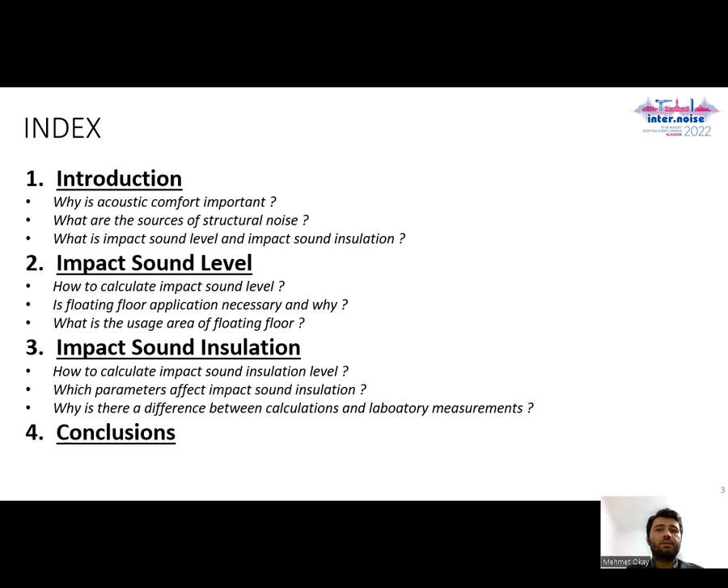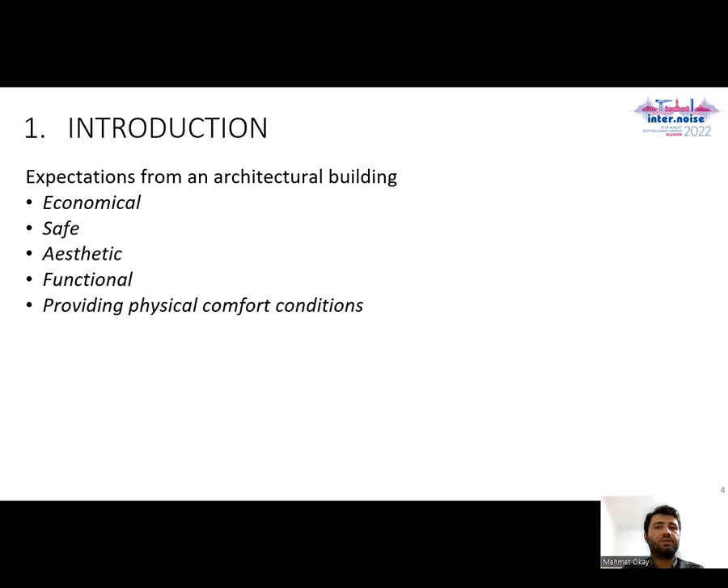As you know, we have expectations from today's architectural structures such as being economical, safe, aesthetic, functional, and providing physical comfort conditions. Physical comfort conditions can be explained as thermal comfort, visual comfort, and acoustic comfort. Noise control and volume acoustic studies are carried out as the subtitle of acoustic comfort.

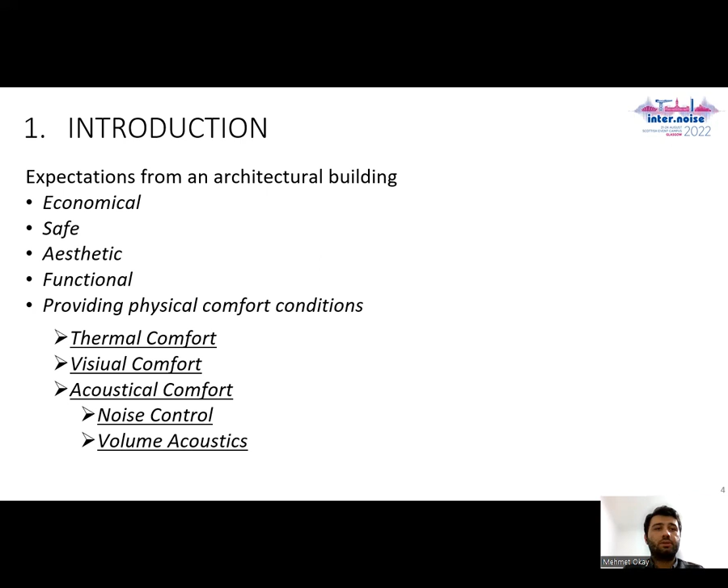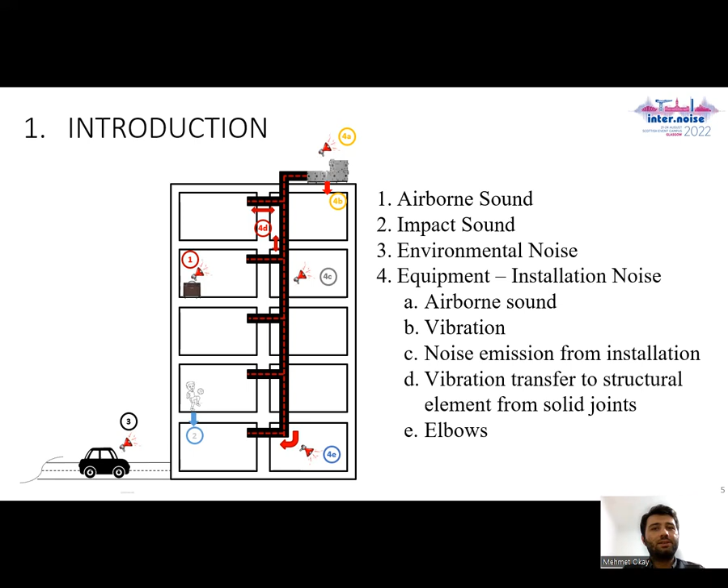Due to city life and living in high-rise buildings, we are exposed to many noise sources in our homes and workplaces. Each of these noise sources negatively affect our lives due to their psychological and physiological effects on people. However, due to the differentiation of the solution method, impact sound insulation is considered to be of particular importance.

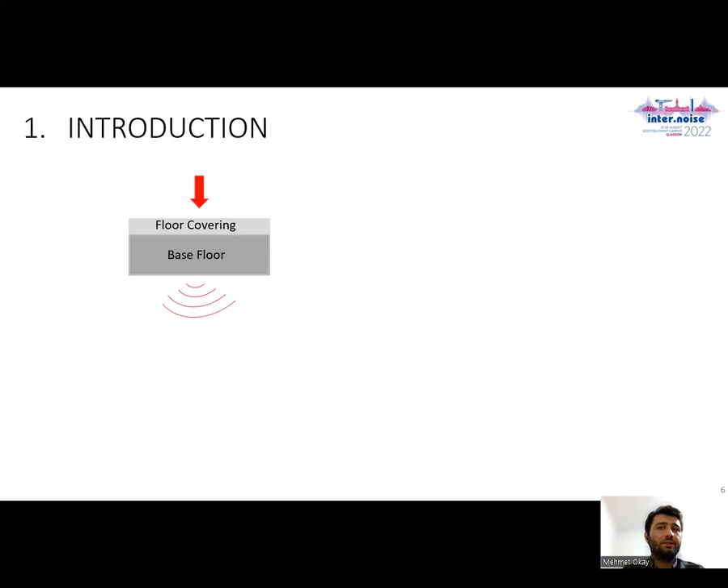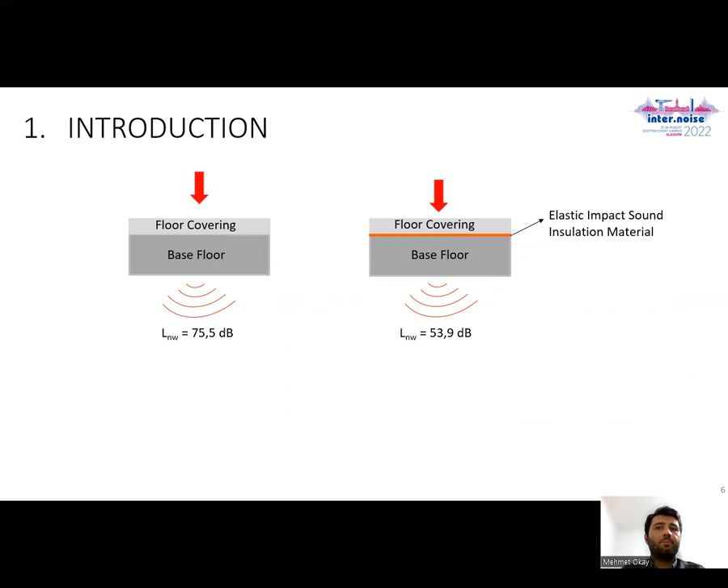The sound heard on a lower floor due to the impact on the floor is called impact sound. An elastic material should be used between floor covering and floor in order to reduce the impact sound on the lower floor by reducing the impact on the floor. Impact sound level difference between sections with and without elastic material is expressed as impact sound insulation.

Since these solutions should be applied in principle for impact sound insulation, eliminating the discomfort caused by incorrect application, wrong calculation, or wrong material selection causes very significant time and cost losses. For this reason, the right solution of impact sound insulation at the design stage is crucial.

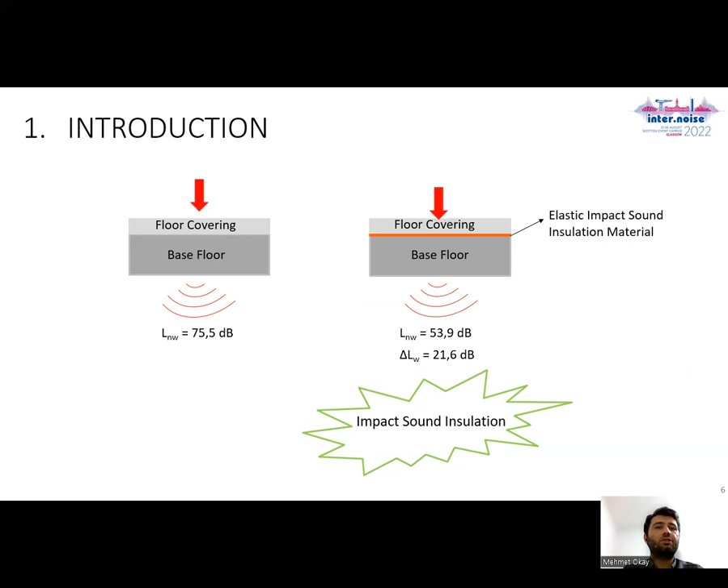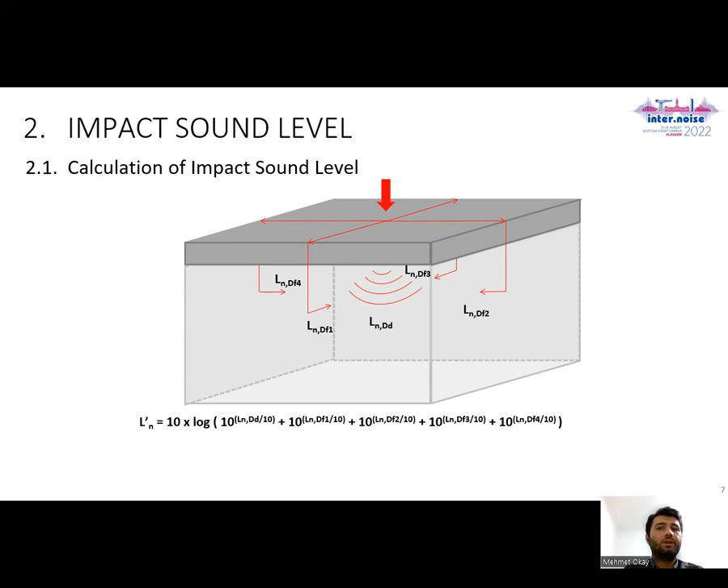Direct and indirect transmissions are summed on a logarithmic basis for the total impact sound level generated in the receiving room. After the volume effect is included in the calculation, it is weighted according to EN ISO 717 Part 2 standard and turned into a single number.

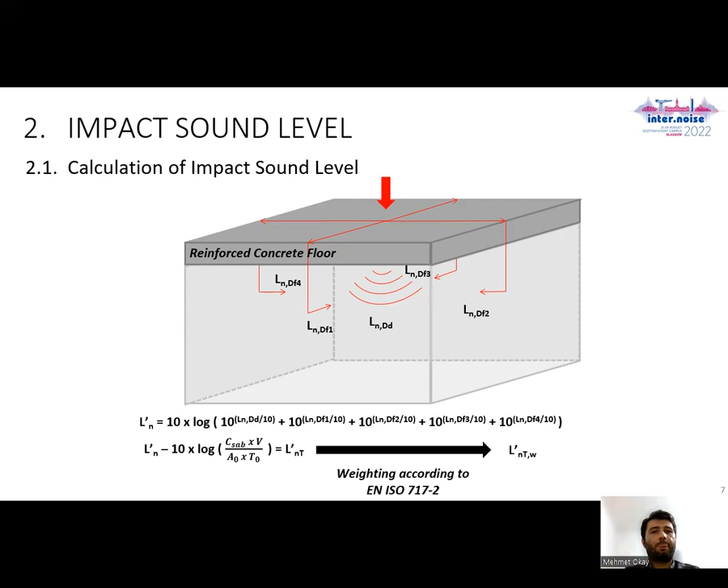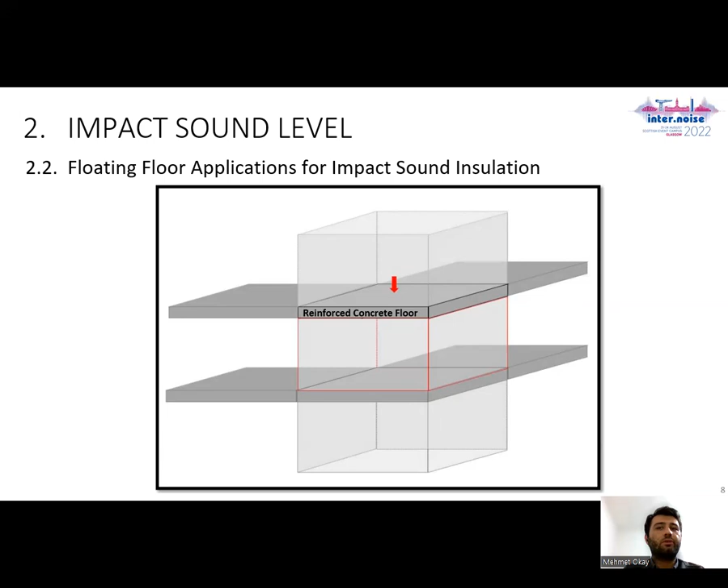In order to understand in which situations a floating floor is necessary, a theoretical model living space has been established, as seen in the figure, according to the most unfavorable combination and structural element situations. The theoretical model living space was chosen as a room located in the corner of a building and on the mezzanine. This is the plan view of the theoretical model living space.

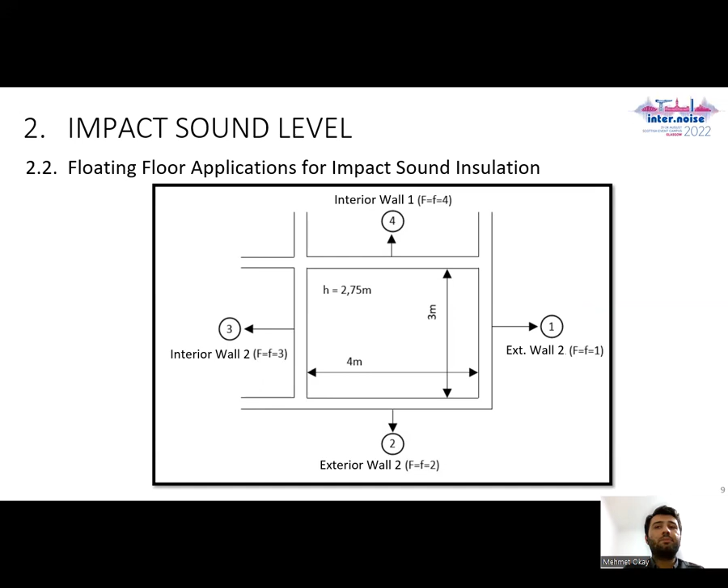In this theoretical model living space, only the floor thickness was changed between 15 and 40 centimeters, and impact sound level calculations were made by keeping all the variables constant. The calculation results and the highest allowable impact sound levels, according to Turkish standards, are compared on the chart.

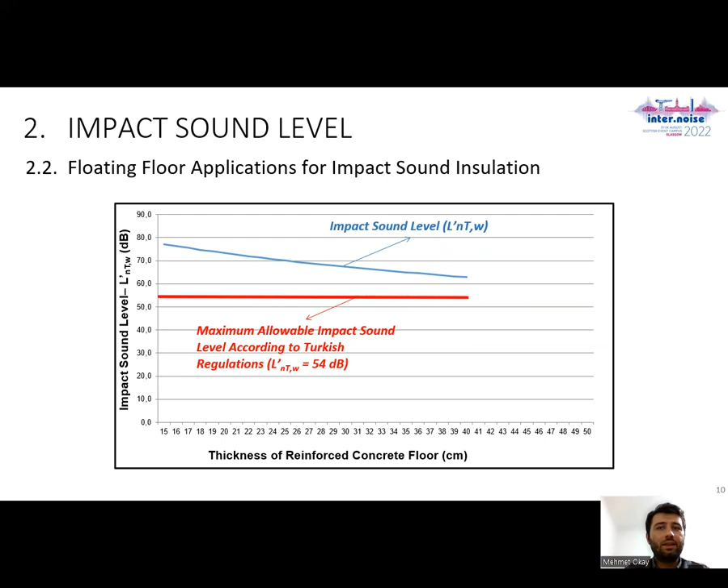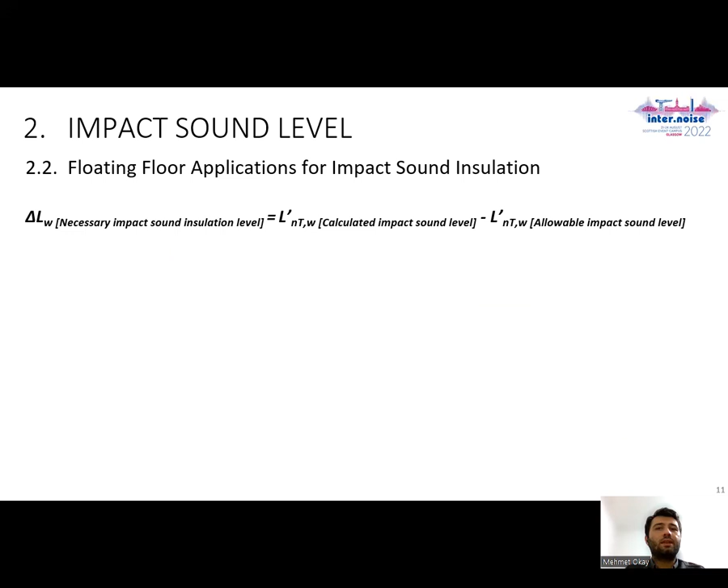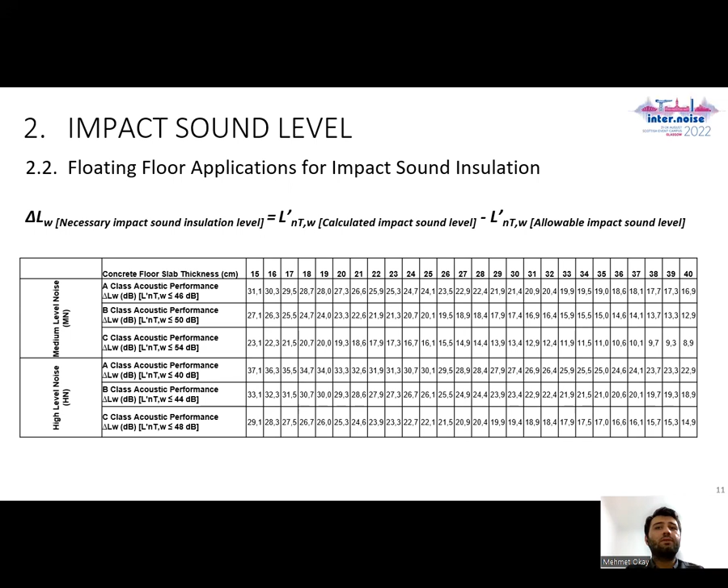According to the chart, impact sound insulation evaluation is required for all reinforced concrete floors with a thickness between 15 centimeters and 40 centimeters. The arithmetic difference between the two graphs reveals the impact sound reduction that the floor covering must provide. The table shows the impact sound reduction required to achieve acoustic comfort according to the noise level and the targeted acoustic performance classes.

According to this examination, it was seen that delta LW 19 decibel is the transition zone. In general, impact sound reduction of up to 19 decibel can be achieved by insulating the impact sound under the floor covering, while it has been observed that impact sound reduction from 19 decibels to 37 decibels can be achieved with the floating floor application. For this reason, the table has been arranged as it is in order to understand the necessity and usage area of floating floor.

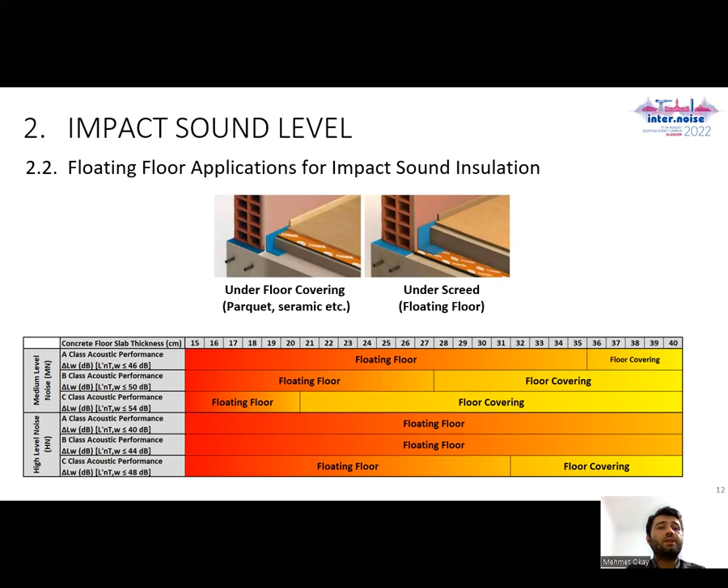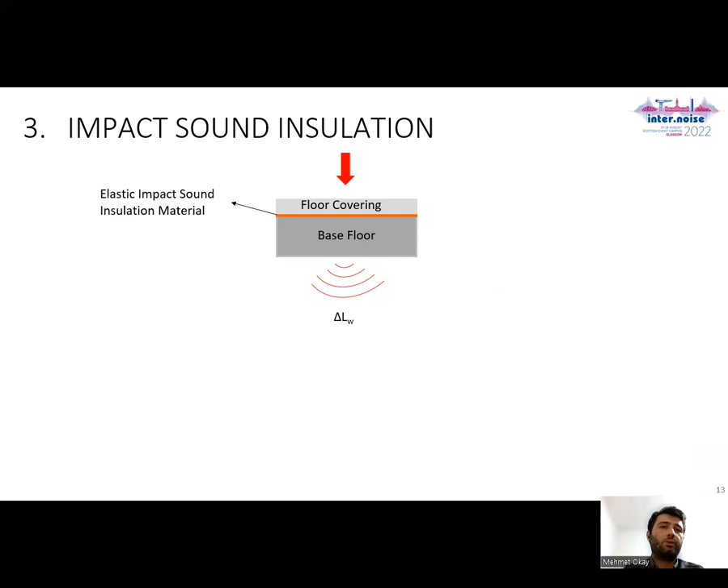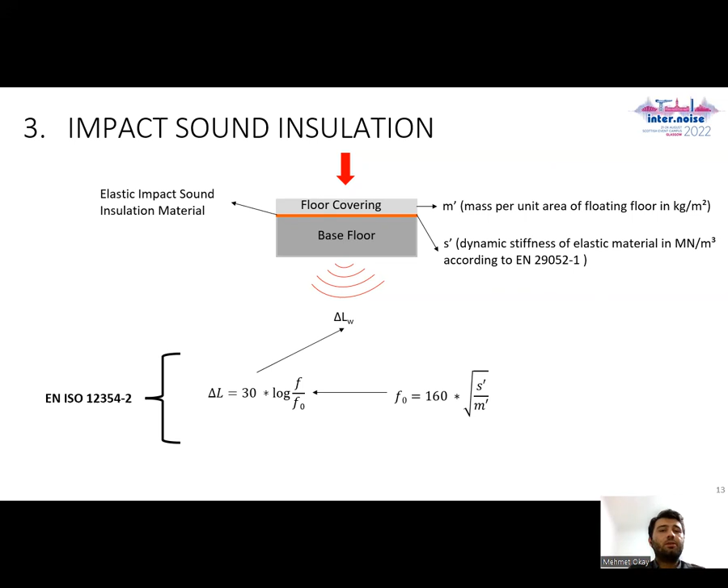As can be seen from the table, floating floor has a very wide usage area. Impact sound insulation calculations for floating floor are made according to the EN ISO 12354 Part 2 standard with shared equations. As can be seen from the equations, the impact sound insulation according to the calculation method depends on the mass per unit area of the floating floor and the dynamic stiffness of elastic material. However, studies show that there are differences between laboratory measurements and calculations. In this part of the study, the factors causing the difference were examined.

Firstly, dynamic stiffness. Dynamic stiffness is measured in the laboratory according to EN 29052 Part 1 using a steel plate measuring 20 centimeters times 20 centimeters and weighing 8 kilograms. Assuming that this measured dynamic stiffness is constant in all cases, impact sound insulation calculations are made. However, in the study, the results of which are shared in the table, dynamic stiffness values were obtained from laboratory measurements of impact sound insulation by reverse engineering with the relevant equations.

According to the table, two conclusions are drawn. One, measured dynamic stiffness and obtained dynamic stiffness are different. Second conclusion is dynamic stiffness varies depending on the mass per unit area of the floating floor.

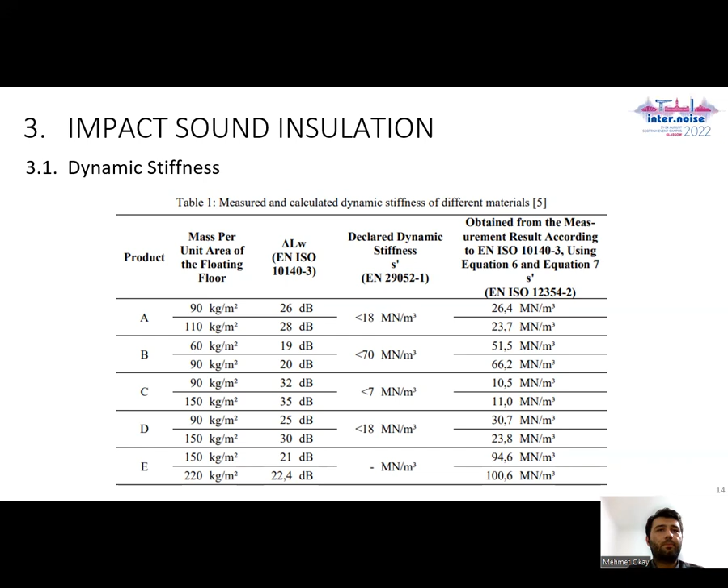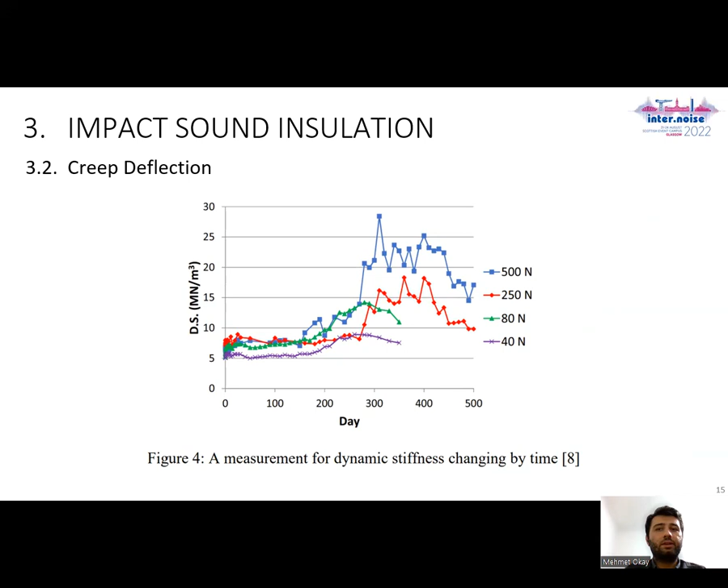Secondly, creep deflection. It is well known that the impact sound insulation materials are subject to creep deflection due to the constant pressure on it. This study, whose results are shared, reveals the change in dynamic stiffness of the material due to time-dependent compressive creep.

Thirdly, dimensions of floating floor. The results obtained with the current calculation model according to the EN ISO 12354 Part 2 standard are obtained independently of the dimensions of the floating floor. However, the study whose results were shared shows that the variation of dimensions of the floating floor affects impact sound insulation performance.

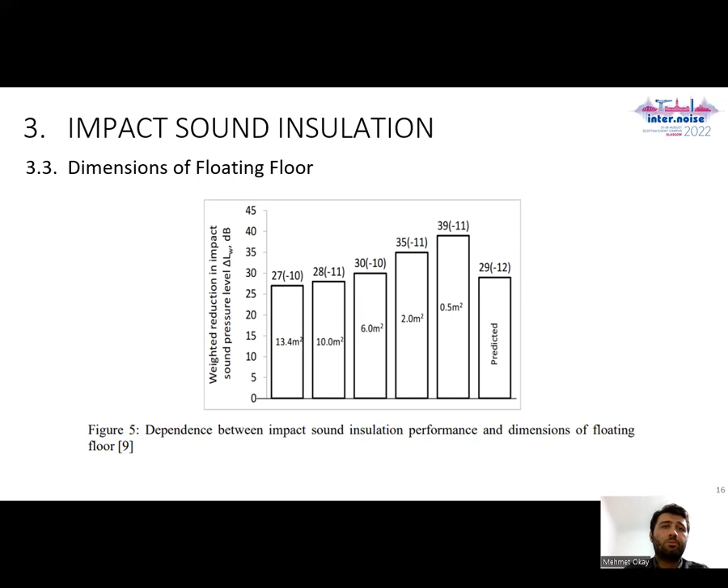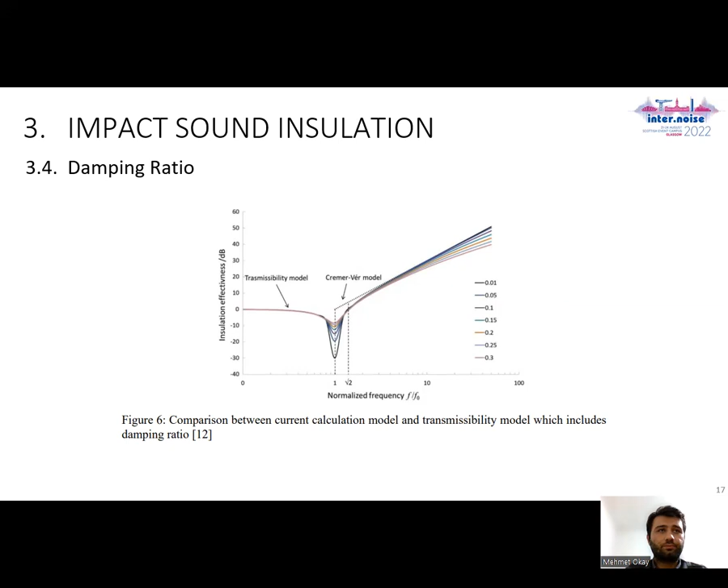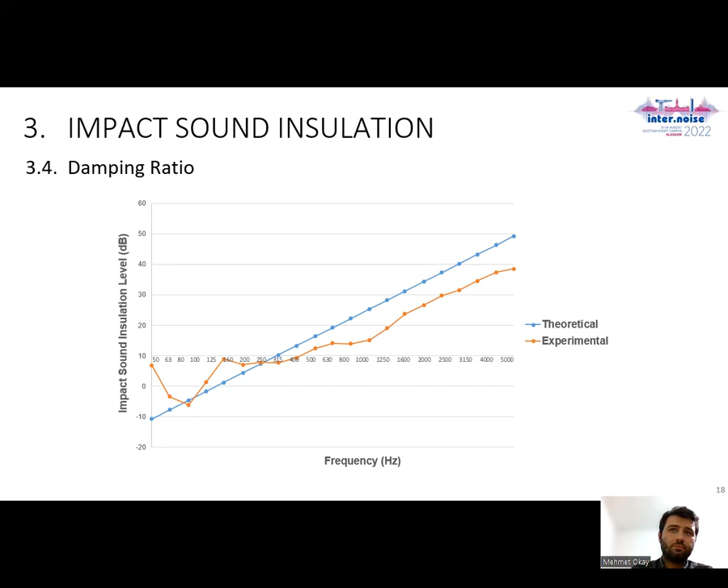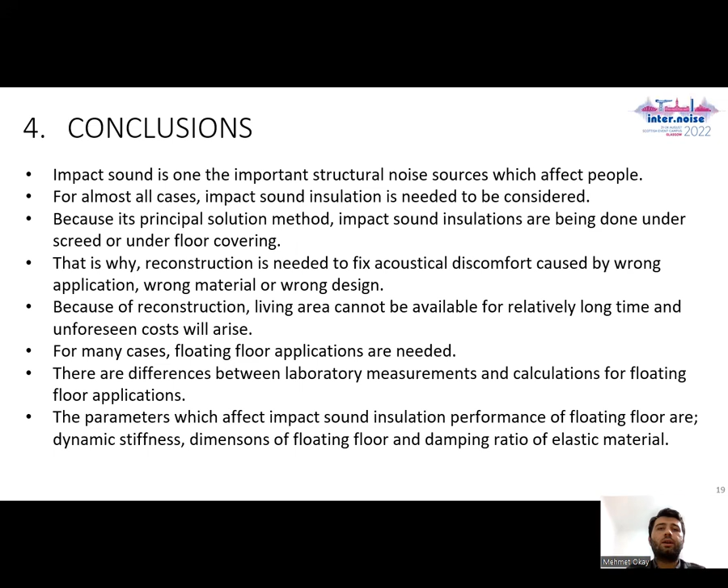For many cases, floating floor applications are needed. There are differences between laboratory measurements and calculations for floating floor applications. The parameters which affect impact sound insulation performance of floating floor are dynamic stiffness, dimensions of floating floor, and damping ratio of elastic material. Because it varies with mass, dynamic stiffness can be measured with 20 centimeters times 20 centimeters steel plates of 4 kilogram, 6 kilogram, and 10 kilogram in addition to 8 kilogram.

Because of creep deflection effect, dynamic stiffness can be measured 21 days after the system has been prepared. Impact sound insulation performance can also be measured 21 days after the system has been prepared. Because of its crucial effect, a new calculation model which includes dimension of floating floor and damping ratio of elastic material can be